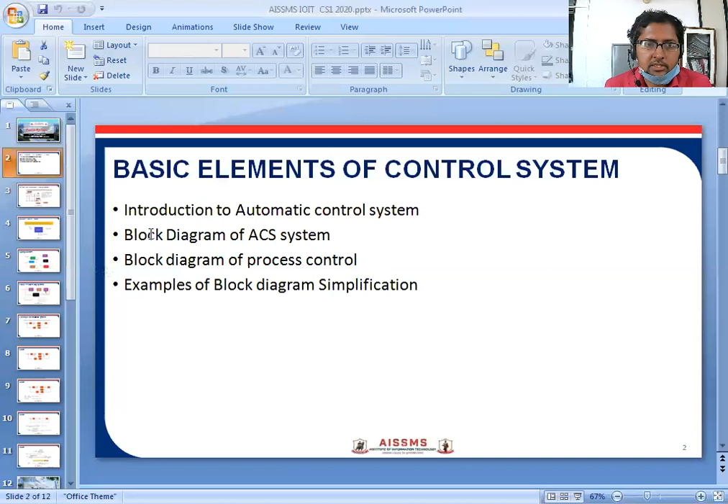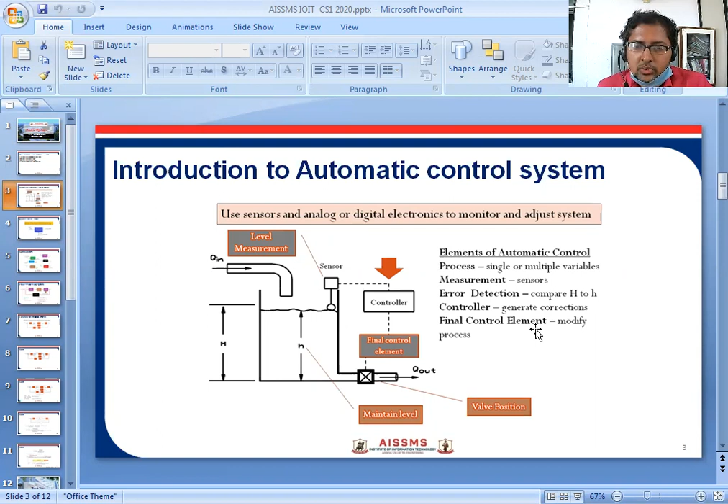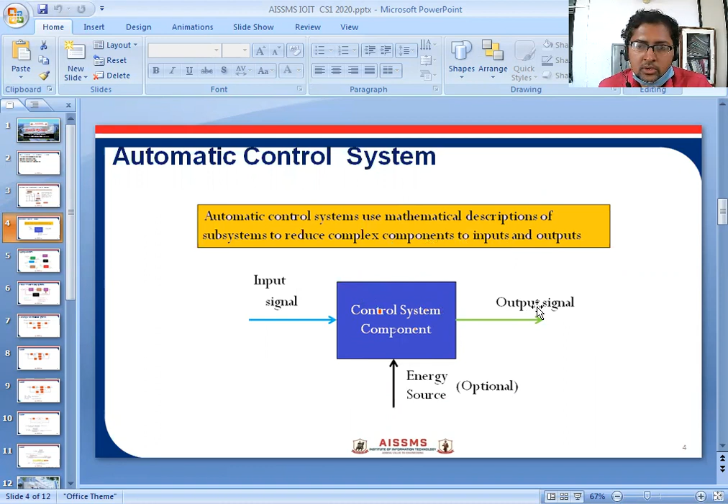So in the automatic control system, there will be some mathematical expression. Here you can look at this control system component, it having some input signal and it having some output signal. So there may be some option like energy source, or it may be in optional form.

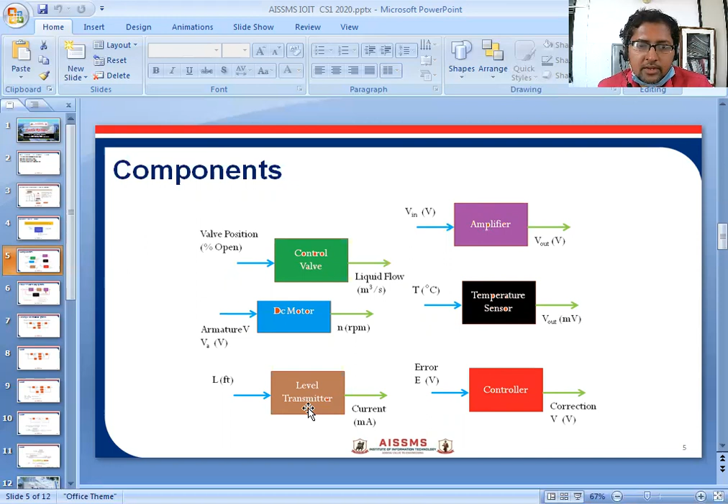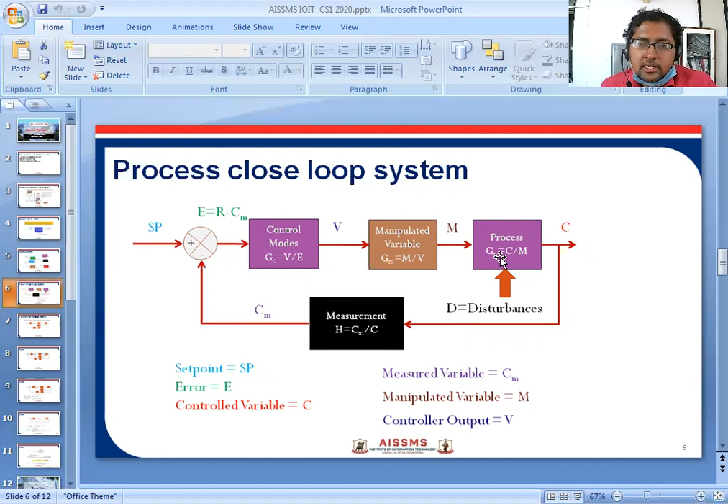So here you can look at here, there will be some controller mode or something, and here manipulated variable and all these things. So depending on that, the process control can be controlled.

So block diagram reduction technique, which will be simplification, so that it will be easy to understand what type of control system it is, and it will give enough information about the output versus input.

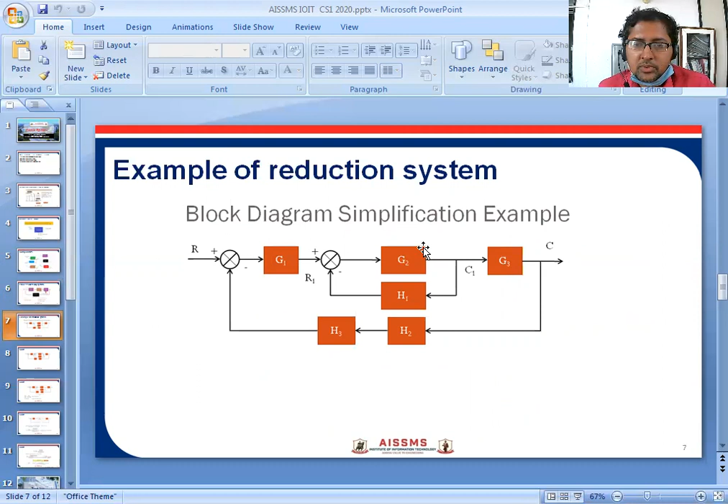So here you can look at, there will be two set points, then there will be some systems having G1, G2, G3, H1 is feedback here. So in the simple reduction process, first of all, we need to solve this part, because this is a complete closed loop system and you have to use some formula.

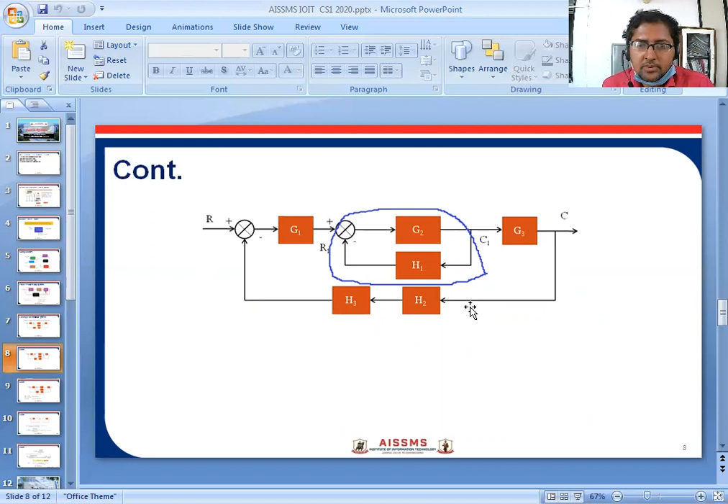So here you can look at, this system having that formula of G2 divided by 1 plus G2 into H1. Why is it 1 plus? Because here it is negative feedback, so negative feedback we should take as a plus symbol. So reduce the inner loop as well as reduce the outer loop.

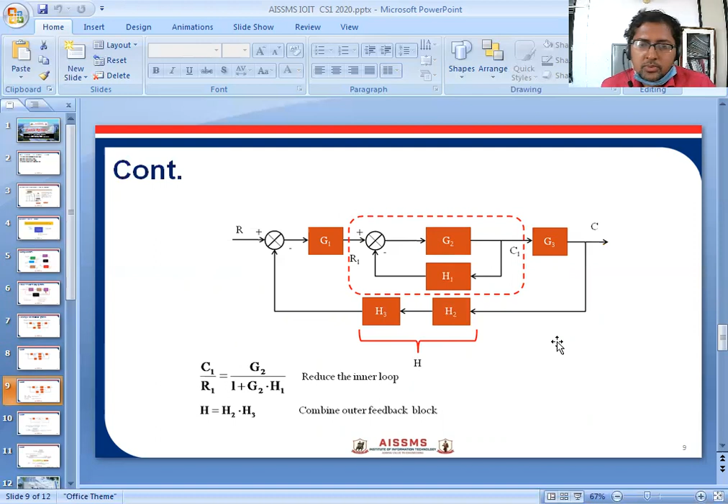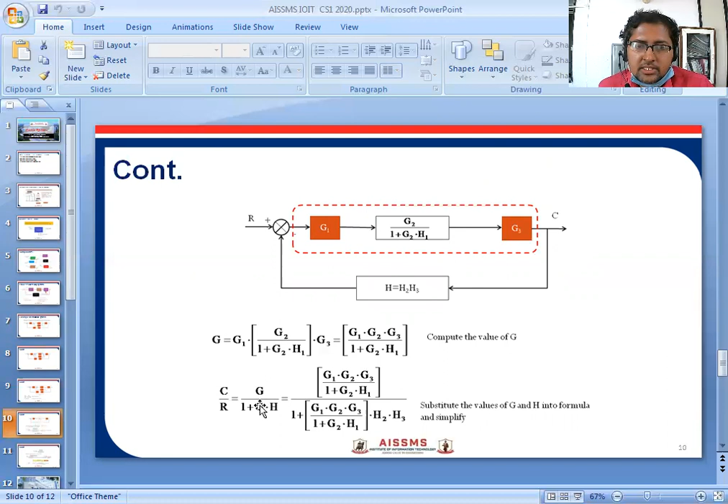H3, H2, as it is in series form, so it will be multiplied. After that, this calculation will again have all three systems in series form, so all will be multiplied here. Then again we have to use the same formula, G divided by 1 plus G into H.

So after all this calculation, we will find C by R, that is output by input. So this will be our reduced form. This way we can calculate simple block diagram reduction technique, but we have to use some reduction technique or principles so that we can find, at the end, the reduced form.